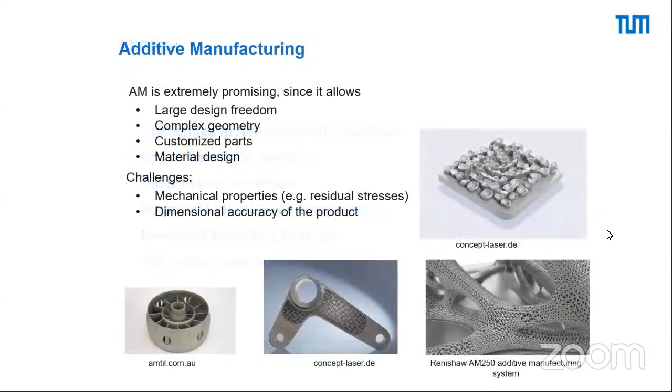Let me start with - I think this introduction is really not necessary in this seminar, so I have only one slide. Additive manufacturing is extremely promising. It offers large design freedom, very complex geometry, but it also has a lot of challenges.

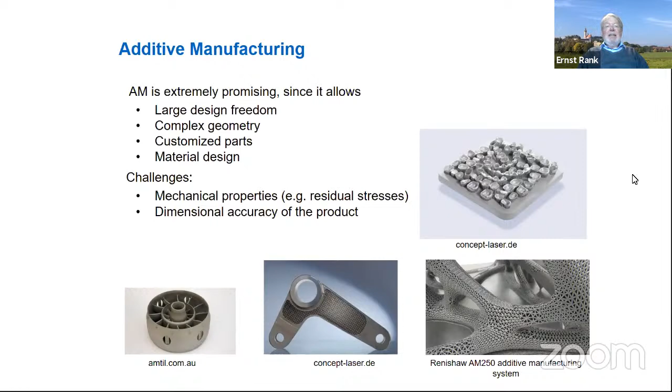I just mentioned two. Wherever the mechanical properties, and in particular the distribution of mechanical properties, are important, then we really have problems to solve. And the same, if the dimensional accuracy of a product is important, then additive manufacturing is in many situations not completely competitive with other manufacturing technologies which we are having. So there is still a lot to do, and I think the simulation can help a lot in it.

Main challenges - I will concentrate in my talk on laser powder bed fusion as a technology for AM processing, where it has to be said, of course, that quite a few other technologies for producing metal additive printed parts have very similar problems.

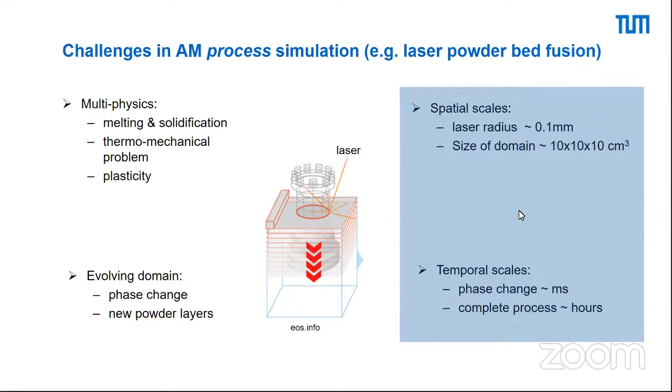The problems there are multiphysics, we have evolving domains - this, I think, is completely clear from the process itself. I will concentrate on the right side of this slide, so on the spatial scales and also on the temporal scales, which are, from a simulation point of view, I think, as demanding in the temporal as in the spatial scales.

Looking at the scales which are there, it's a small plate, 2.5 by 2.5 centimeters. Looking at the melt pool we are having there, the dimensions are in the range of 400 micrometers in length and about 40 micrometers in depth.

This very simple example, one stroke only, one layer only, so one cannot really speak about additive manufacturing or 3D printing there. Nevertheless, the difficulties already get visible for this very simple example.

Well, what do we have if we look at the thermal problem only in this case? I boil everything down to the most simple problems which we can address, but where we see all the problems.

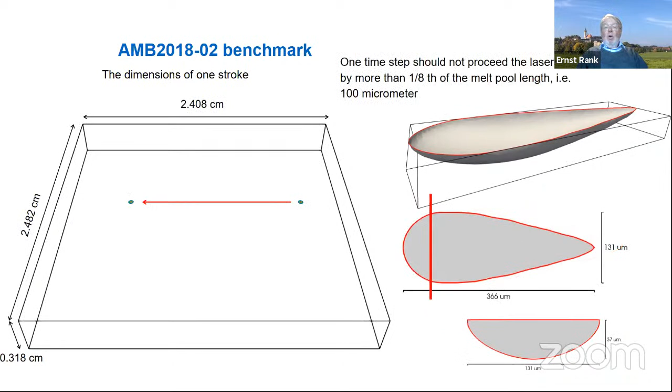If we want to follow the path of the laser, there is a rule of thumb that we should not have time steps larger than, say, 1/8 or 1/10, maybe 1/5 of the order of the melt pool length. So this is the physically motivated time step: move the laser by such a length, which would be about half of the diameter of the laser spot itself.

What does this mean? This shows that we go at most 100 or 50 micrometers, meaning that for this simple stroke which we are having here, we need about 500 time steps for this one simple short stroke of 2 centimeters.

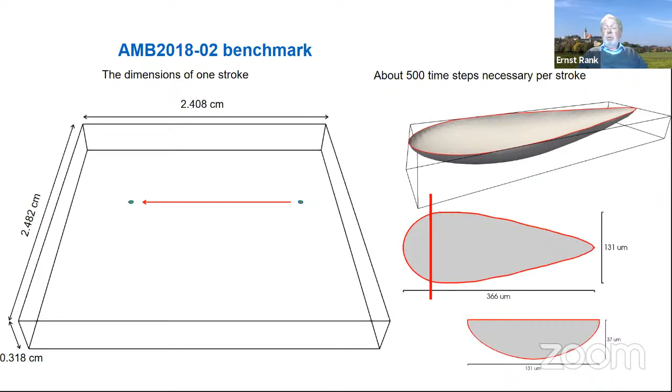Let's look at a little bit more complicated problem. Let's look at this square, which is hatched, again 20 by 20 millimeters, and the enlarged part shows the scan strategy of the laser. It goes diagonal, starts up in the corner, goes out in the corner, and then goes to and fro in the diagonal direction of this square.

We already have, for this very simple problem, again only one layer, a laser path length of about 2.5 meters, meaning that for this we need 50,000 time steps if we really want to resolve the physics on the scale of the melting pool.

I think it's not necessary to mention that a lot of the important physics happens on scales much lower, going down to the molecular level, but I only concentrate on this macroscopic level, from the melt pool to the laser path. 50,000 time steps are necessary by the physics if we want to resolve really what happens with the laser in this thermal problem.

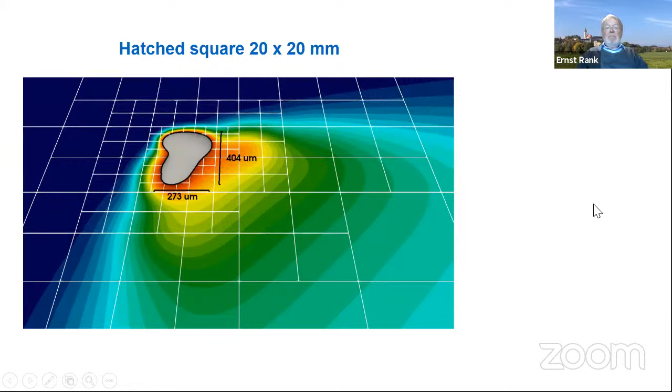We see the dimensions, and one thing I want to mention is if you look at the shape of the melt pool, it is not that easy as it was in the simple single stroke. It is a really three-dimensional shape which we are having there, and this shows that the strokes, the different directions of the strokes, just around the corner here, influence each other.

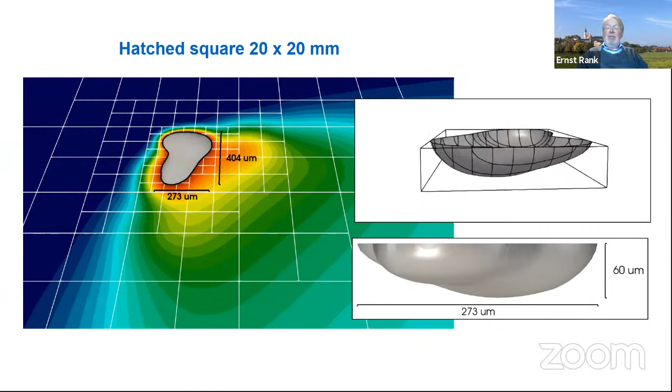Of course, there is a possibility to shorten the simulation by not looking at an individual stroke, but by looking at a full layer. We can get a lot of information out of it, but to really simulate more of the physics and the interplay between the different strokes, we really should be able to follow the direction and the path of the laser.

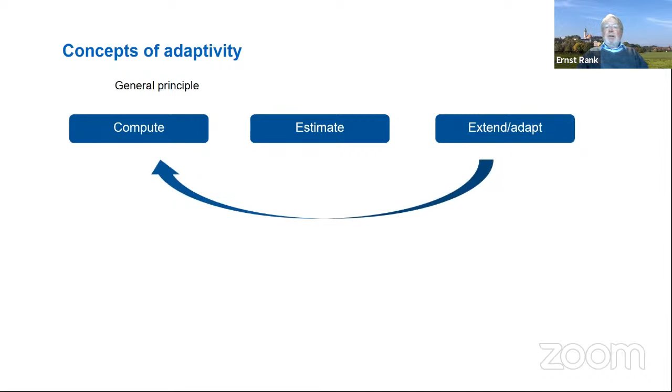So what does this mean? We need adaptivity. The general principle of adaptivity is we compute, we estimate something, we may estimate the error, or we may estimate other quantities to which we adapt. We extend or adapt the space of approximation from the computational point of view, and we loop over this until some criteria is met which allows us to stop the computation.

So for the extension or adaptation in space, we have the well-known H version, meaning we refine or coarsen the mesh. We have the P version, we increase or reduce the order of approximation, or if we use isogeometric analysis, we may also have a combination like increase and reduce order and continuity.

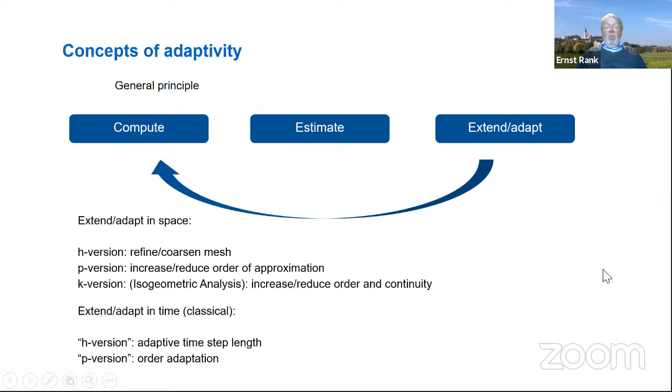Looking at the time scale, and this is important, we have a spatial-temporal problem. We have the possibility to also adapt the time step length, or we can adapt the order of approximation. So this is what is possible there. Please be aware, and I think this is important, when we simulate additive manufacturing, we are always talking about 3 dimensions in space.

So space and time means 4 dimensions. And this is exactly where I think a large challenge from a numerical point of view is: we should have 4-dimensional adaptivity in space and time.

And this brings me to space-time finite elements, which we consider a very interesting candidate, in particular if we look at adaptivity. For space-time finite elements, there is a long list of literature. It started already in the 1970s, and recently, if one looks to the research of Langer, it goes to isogeometric analysis.

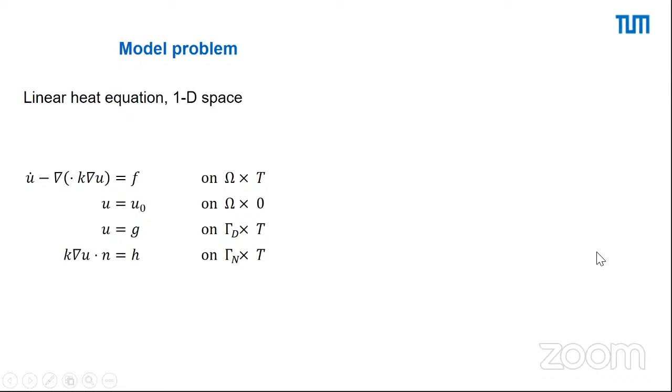To our knowledge, there is not yet any really general software around which would be adaptive in space and time, so in this 4-dimensional setting. I will try to show you some ideas and first results which we have in this direction.

So let's look at a model problem, and to explain it, I start with the linear heat equation in one space dimension.

So, general formulation as you see it here: what is used in most, I would say 99% of all cases in engineering applications, is the method of lines, meaning that we have a different approximation type in space and in time. So in space, for example, with finite elements for the spatial operator, the Laplace operator which we have here, and finite differences in time.

And well, you can use many schemes. I formulated here just the backward Euler. That's standard. And this means if we draw the space-time grids which we are having here, horizontal for space...

...so one-dimensional, and vertical for time, then we have a uniform, adapted grid, so just these elements which we have here in one line, at one time step, we are, in the simplest case, proceeding in equal length time steps we are having here. So this means that we refine and de-refine with equal long time steps.

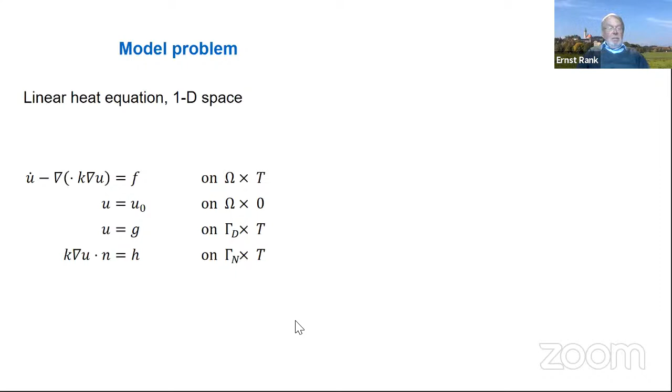Okay, so let me stop. That's astonishing, I see it. Stop the presentation mode and maybe restart it. Yeah, I stopped the presentation mode, one second. It's an informal seminar, so we don't worry. Yeah. I have a problem with my... It doesn't matter how many times we try, and you know how experienced we are, there is always the possibility that something doesn't go perfectly right.

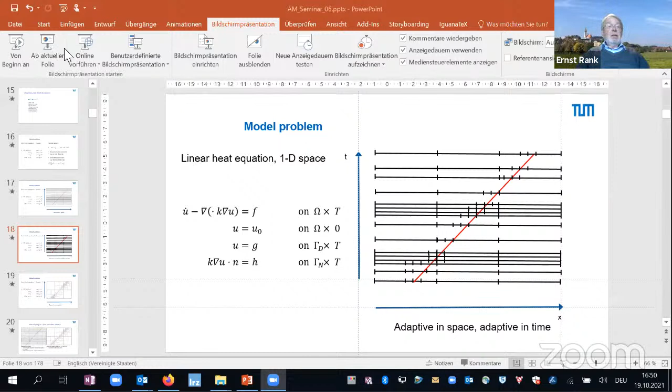Almost, okay. So you saw the movies at the beginning? You did? Yes, okay, it took a little bit of time, but then we saw it. Yes, okay, so let me check now again. I have stopped my PowerPoint and started it again. So now you see the... Yes, presentation mode, is it right? Yes, exactly, now we see the picture. Yeah, okay, so now let me... Okay, do you see still the picture? Yes, now we do. Okay, so there was some problem with my PowerPoint here, obviously.

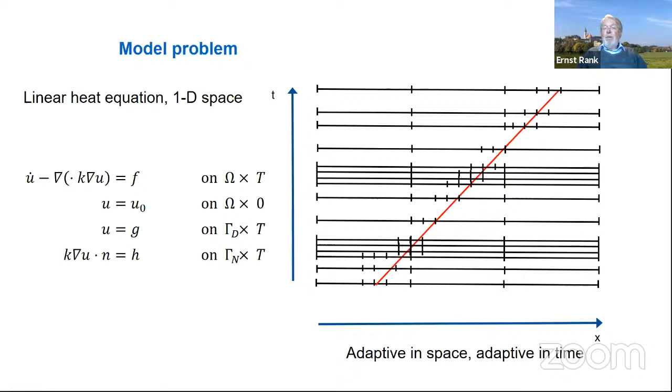Okay, so now here we have the adapted grid, and well, what you see here is a typical grid of a locally refined spatial problem. This is what we would have here, but this is different from time adapted. And this one, which is still a kind of adaptation we are having here, has of course a few problems compared to what we really would like to have, like this one.

If I compare these two approaches, well, here, either with the uniform or it would be the same with the time adapted, we have parts which are out here - for example, you see my mouse here? Yes, we do. Okay, in parts here, we have much too small time steps.

Nothing is happening, and this would be far away from the laser in a sense. Nothing is happening, nevertheless we are having small time steps. This is different if you look at this as space and time. So I have here coarse space and coarse time, so much more advantageous with respect to the number of degrees of freedom.

There is another problem in this method of lines, and this comes with high performance computing. As you all know from the structure of this method of lines, we can compute one spatial problem for one time step. Even if this may be rather large, if you have really huge hardware, high performance computing, then this might be a problem which is too small to be really efficient.

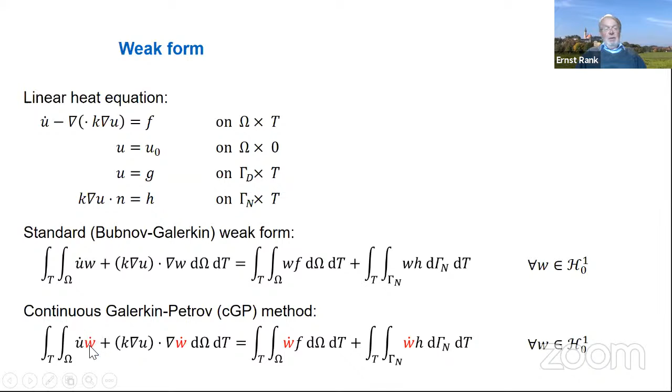Another one, and there are many methods around, another one which we are investigating and using, where you use instead of the functions for weighting the derivatives of the function, so that you get here a kind of symmetric term in the time derivative. This is then continuous for the shape function, so continuous Galerkin, and a Petrov-Galerkin in that sense that we have a different derivative in the weighting functions.

Okay, so as I said, we want to go, and we really want to make the big step. We want to go adaptive in space, adaptive in time. We want to be able to make H refinement, and we want to be able to make P refinement. So the full register of all possibilities which we would like to have.

What we are using is a variant of the multi-level HP refinement, as we call it. What is the idea of it? First, look into the one-dimensional example. Lowest level, we have shape functions: linear ones, quadratic ones, cubic ones, and quartic ones in this case.

In principle, in all 3 one-dimensional elements. So over the middle element, we take out the higher modes. We use an overlay mesh where we have again a similar ansatz, so linears, quadratics, cubics, and quartics.

And importantly, at the boundary of this overlay, we impose a zero Dirichlet boundary condition, and we add up these levels, meaning that the sum of this is refined in this middle part, and it is continuous, as at the interface a zero is added from the overlay. And you can do this not only in one layer, you can do it in an arbitrary number of layers.

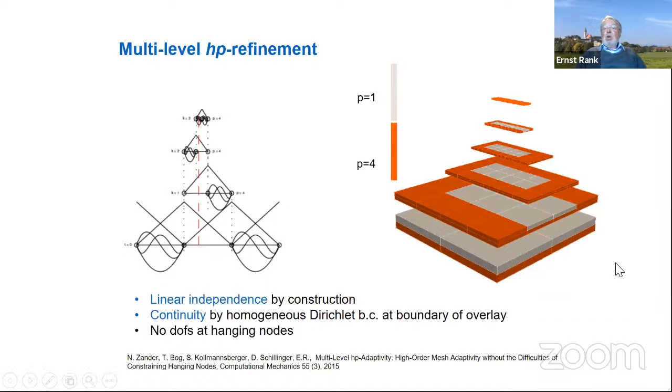Well, how can you do it? We start with a P version of the finite elements, and now I come a little bit technical, but I will try to show that there is a data structure which is extremely and astonishingly simple, so that you can make this adaptation in any spatial dimension.

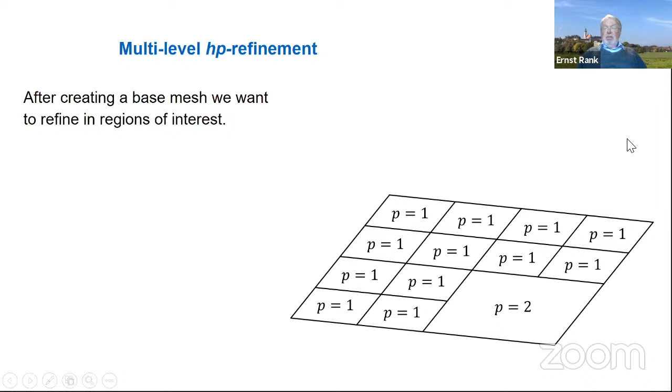We try now to make an approximation, and this is an HP approximation. So, well, if you look at this mesh, then you have something which is a hanging node here, and you have polynomial degree p = 2 and p = 1. So what are the standard approaches? So this is not the hierarchical one. What is the standard approach?

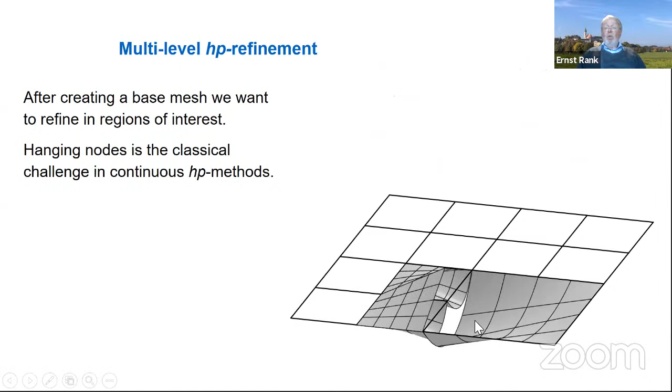We have to deactivate shape functions at these hanging nodes, meaning, well, if we have on the large element a quadratic shape function here, and on the smaller elements we have the linears and these quadratic ones, well, then we need to do something. Looking at these 1, 2, 3, 4, and 5 shape functions, then we need to get continuity, meaning that what is on these elements is composed of this shape function, this, and this one.

So we need a combination A, B, C, and D, so that the continuity is guaranteed. Well, this results in a small system of linear equations to get these coefficients. So this is possible, and this is done in many of the HP codes which are in some research implementations around. Well, the problem, if you want to implement this in 4 dimensions, I would say at least that it is very ambitious. I would even consider it as impossible in practice.

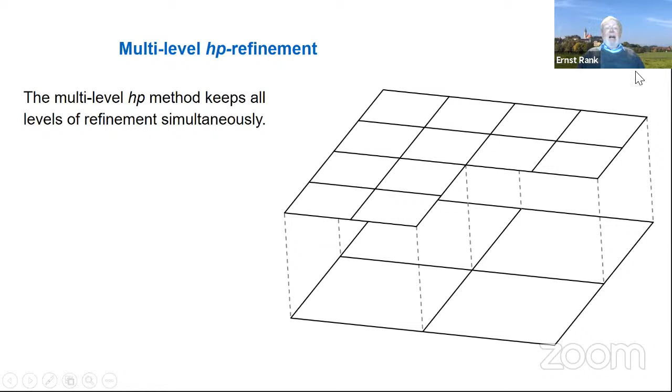Now let's look at the other approach, this hierarchical approach. This is again our mesh, which we are having, but this is composed out of 2 parts: a base mesh, and an overlay mesh in this hierarchy. And now I define first, well, I look at the shape functions which are defined on the base mesh.

For this one I define the quadratic ones in the right or lower element, and the linear ones in the left elements, and in this upper elements, which are below the overlay. So this was the definition of all the shape functions on the lower level.

Now let's look at the higher level. So what is the activated set of shape functions? Well, remember, on the overlay, we choose only p equals 1 for simplicity. You could choose any other polynomial degree. It might be higher than on the lower level, it may be the same, or it may be lower. And this is what we are having here.

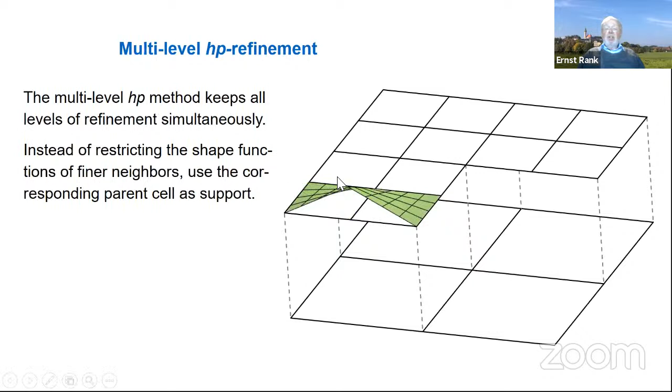So we have this shape function, and this is one which we want to keep in our ansatz space. This shape function, the same, and different to this shape function. Look at this. What is different to this shape function from the one which we had before? Well, it's exactly this edge of the element, which is a connection to the lower hierarchy.

And if you remember, the trick in this hierarchy is that I say, well, along all this boundary which is connecting to the lower level in the interior, I impose 0 boundary conditions. Well, 0 boundary conditions mean I do not take this shape function. I just deactivate it.

Let's look at further shape functions. The one back there has no interior connection to the lower level. The same for this one. This one, again, has a connection along this full edge and is deactivated. Not deactivated, this one—this is active. This is non-active, deactivated, and important also in this element which is in the corner back there.

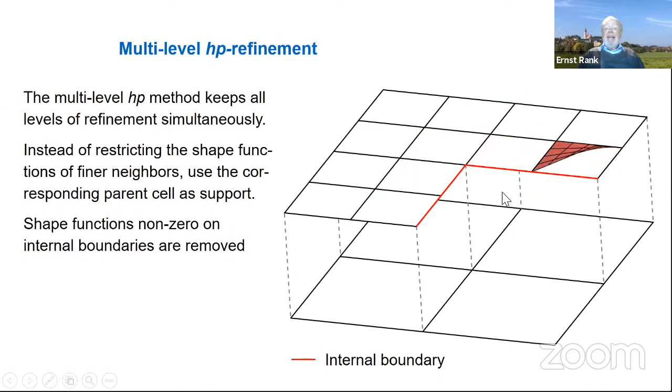And in this way it goes on, and we activate or deactivate shape functions on and on, and we do this for all levels of the hierarchy.

Well, I promised the data structure, and this is something astonishingly simple. What we are using is a d-dimensional array of Boolean variables, a tensor product mask to trace or track active functions.

D-dimensional means, in 2 dimensions, I have a 2-dimensional Boolean template. Now let's look at the equivalence of the activation, deactivation, and the template.

So what are the steps? In the first step, I activate all shape functions which are on the lower level, and on the higher level, the leaf elements. What are leaf elements? These are, if I look from the top, all the elements which I see and where I want to loop over my element matrices.

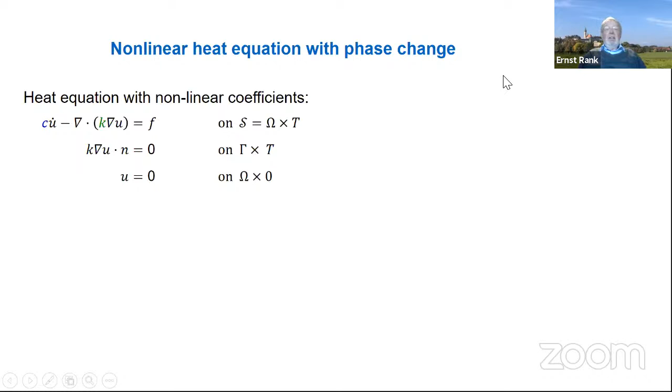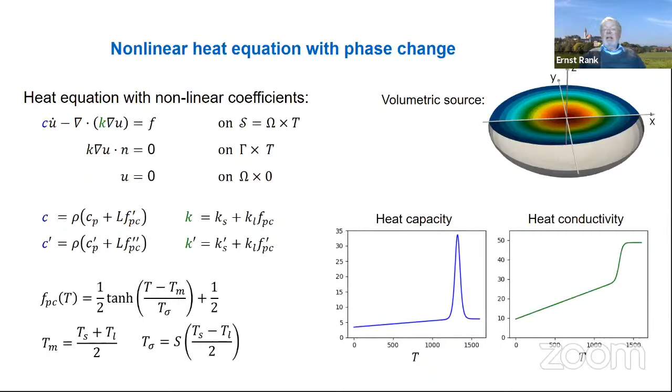The heat equation is now considered in the non-dimensional, non-linear setting. So I have a volumetric heat source. I have a phase change function which defines — I don't want to go into the details — a non-linear heat capacity, a heat conductivity, with a phenomenological model used by such a phase change function, which we are having here.

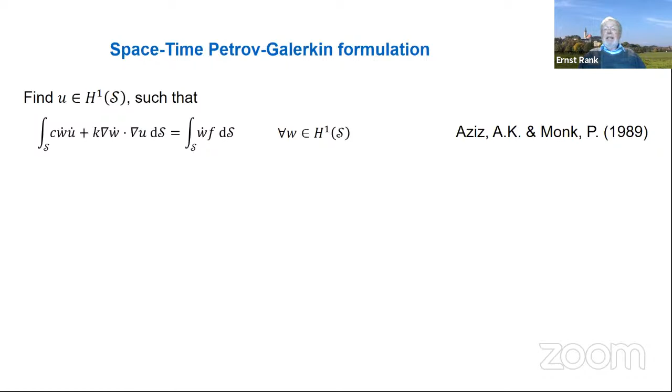And again, a space-time Petrov-Galerkin formulation, which is non-linear now in this case. This goes back actually to 1989, to a publication of Aziz and Monk.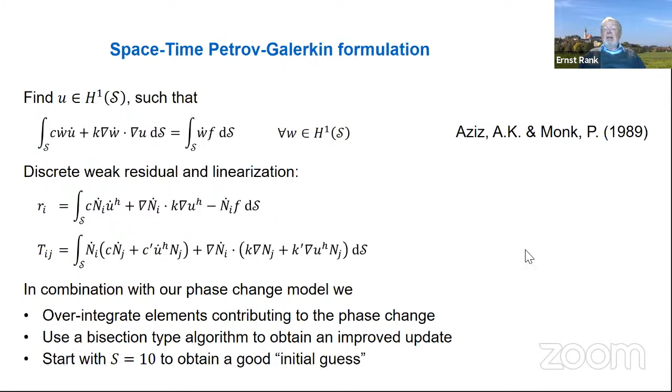So the linearization needs a discrete weak residual, and in the Newton method we solve this in this time-space Petrov-Galerkin formulation, with over-integration in the elements where the phase change exists, and a bisection step in the algorithm to improve the update. We start with a smoothing factor to get a good initial guess in this 4-dimensional Newton finite element method.

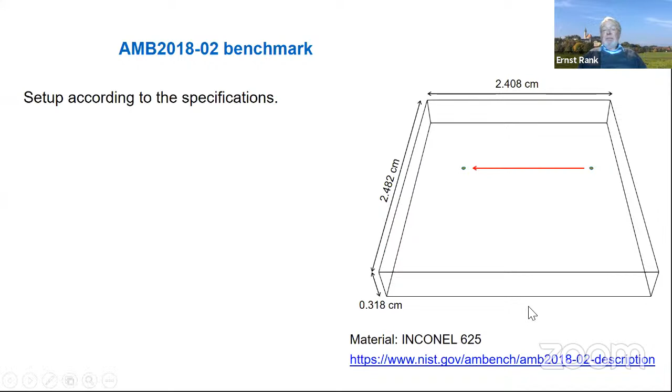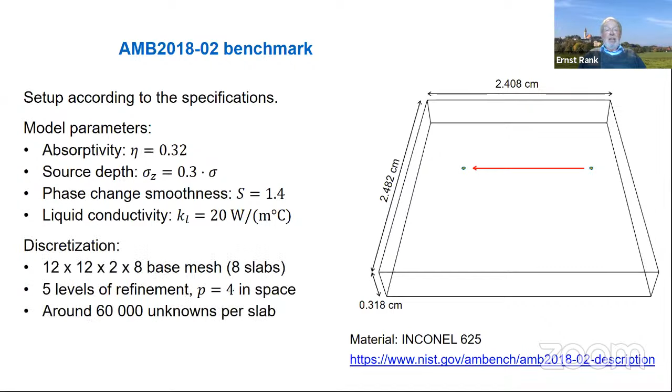Okay, let's come back to the problems which I showed you already at the beginning. Parameters are adjusted exactly as defined in this benchmark problem. I start this 3-dimensional spatial problem, with 1 dimension in time, with a base mesh of 12 by 12 by 2 elements and 8 slabs in time, using a p degree, p equals 4.

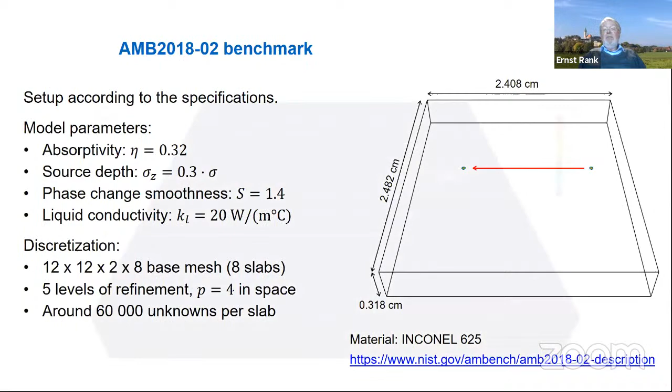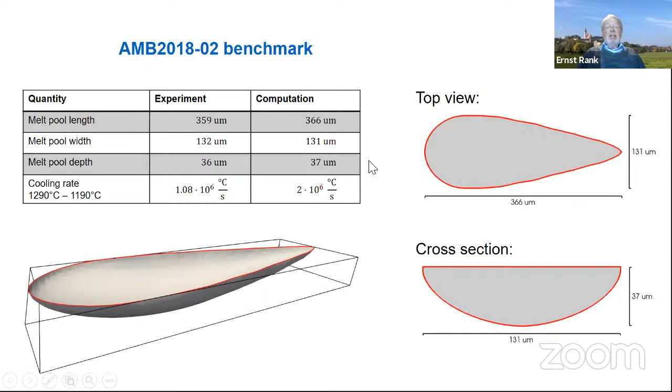So this is quite a high p degree, so high accuracy. And well, you saw this video already at the beginning, comparing experiment and computation with the parameters we have adjusted here. You see a very good agreement in this table concerning the cross section and also concerning the length and width of the view.

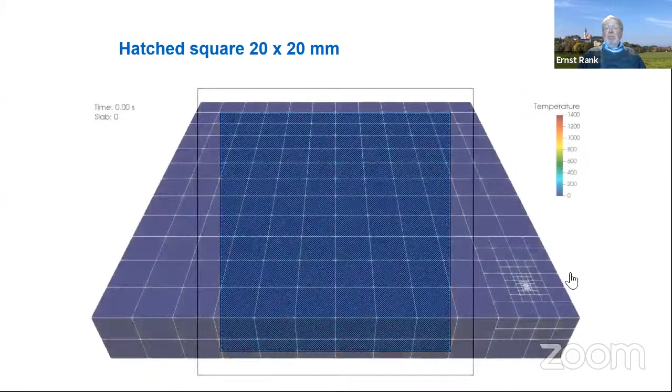Now let's look at this hatched square. You see the laser running first around and then hatching in the diagonal. What is important is the spatial adaptation. On the left side up, you see the slab, so this is the time adaptation. You can see in this cut that it's really three-dimensional.

What you see here would be in real time, so this process is really about 6 seconds. The computation time on a powerful workstation, I would say one CPU, is still in the order of 10 to 15 hours. So still quite a significant time for this problem.

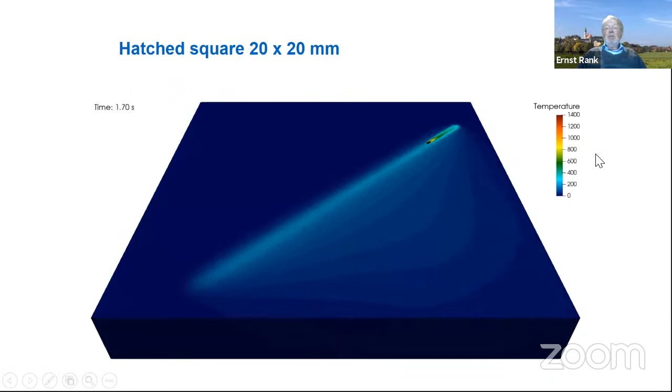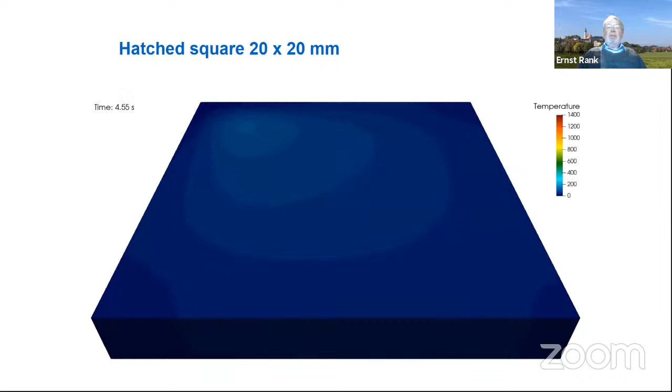But as I said, it's work in progress. We are going now to real high performance computing, where we expect to come down to minutes for this simulation, where really the physics is resolved in this scale from melt pool to the layer.

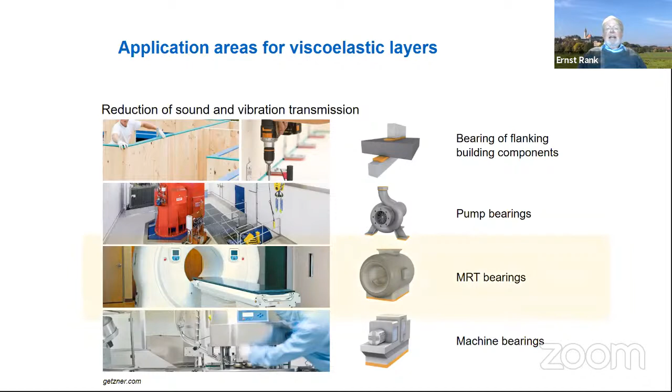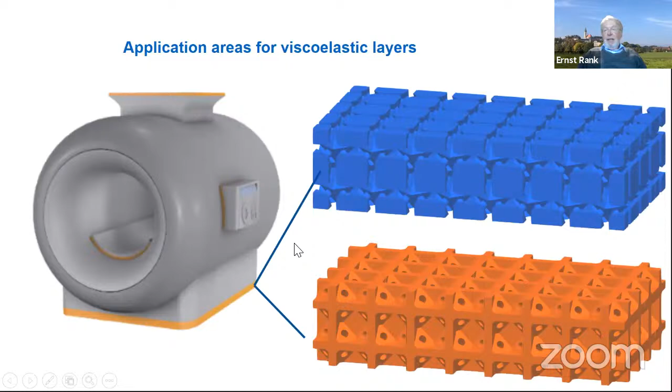Now I will go very quickly to the last part of my presentation, the application area of viscoelastic layers, which I address. This is motivated by an MRT which is layered on a bearing, a really interesting construction concerning a possibility of application of additive manufacturing in a composed way.

Actually, we have first printed parts with our colleagues in the mechanical engineering department in Munich. So this is a first part of the lattice, which is the core of this viscoelastic layer.

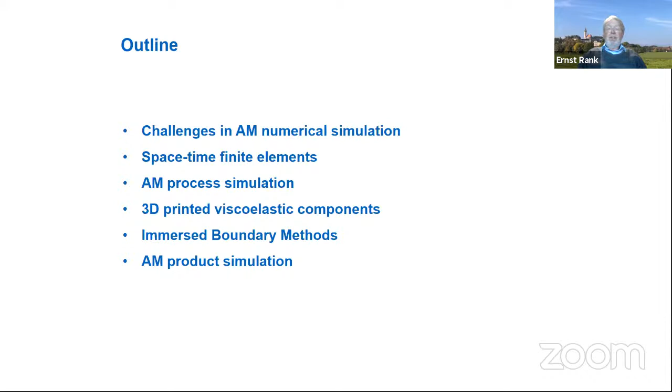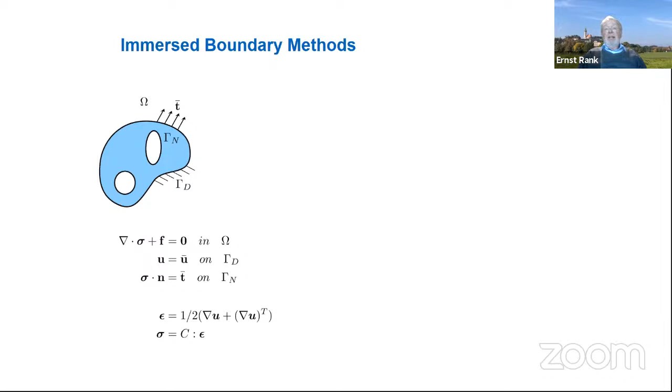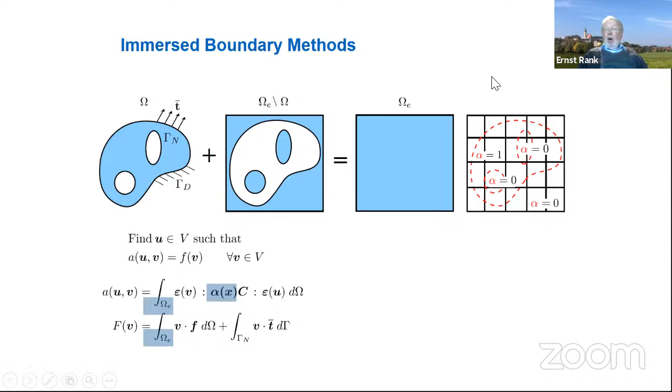We are using immersed boundary methods to simulate this composed structure, and I've talked about these immersed boundary methods very frequently. I give only the general idea: we embed a structure, which may be complex, into a larger, simple geometry meshed in a simple grid. In addition, we have an indicator function which tells us what is inside and what is outside the domain of computation, translating to a formulation on this extended or immersed domain.

These immersed boundary methods have, of course, a lot of problems to be solved. We have cut cells, characterized by the boundary going through these cells or elements. We need to find efficient and accurate ways to define boundary conditions. We have to solve stability and conditioning issues in case of small cut cells. And we also have, of course, to have local refinement.

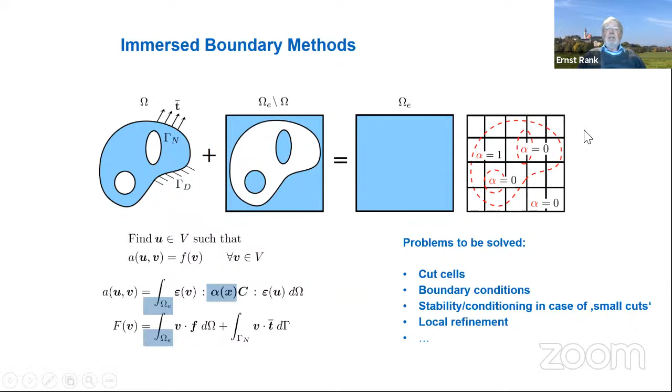But what is important, this can all be used in exactly the same way as I showed before, with this space-time approach. Local refinement in 4 dimensions is possible also for these immersed boundary methods. There are several variants around. I use, and we are using in Munich, the so-called finite cell method, which is high order in time and space, with local refinement, hierarchical, in the way I showed you in the first part of my presentation.

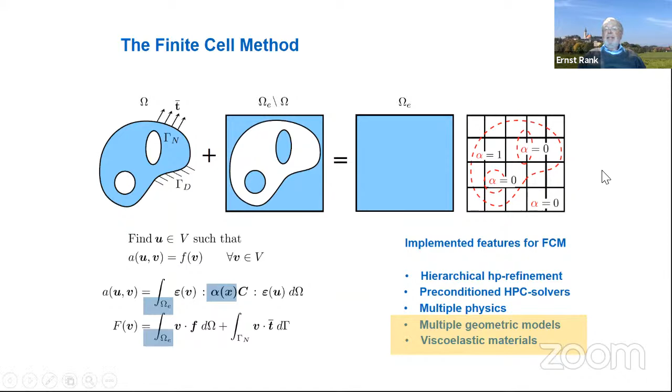What is interesting for these structures, important here for these viscoelastic dampers, is that we can use multiple geometric models, in particular geometric models which are very well connected to parametric design, parametric CAD design, for these basic cells for these dampers.

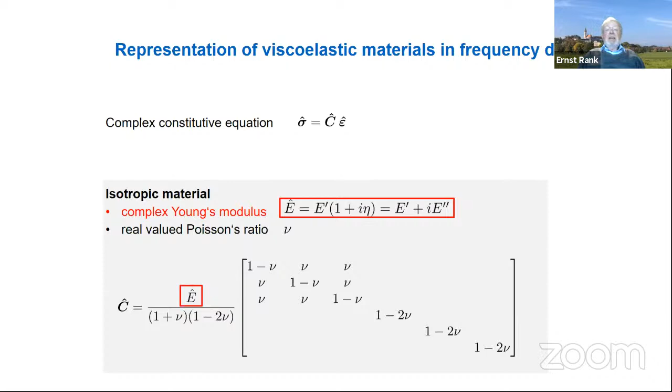The viscoelastic material we are using is a linear viscoelastic material, described by a complex constitutive equation. So what is changing essentially is that instead of a real valued elasticity modulus, we have in this case a complex modulus and a loss factor, which is a measure for the viscoelasticity, related to the materials we use as components of this connection.

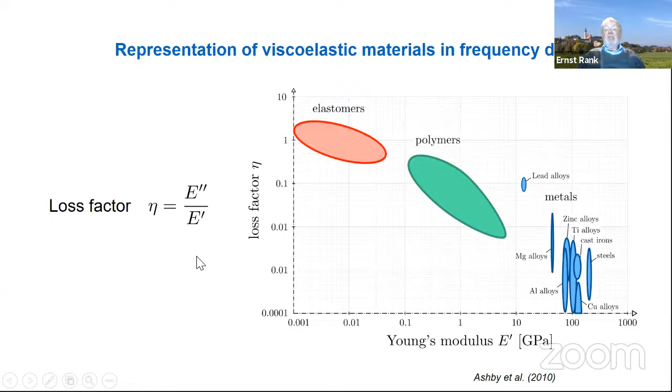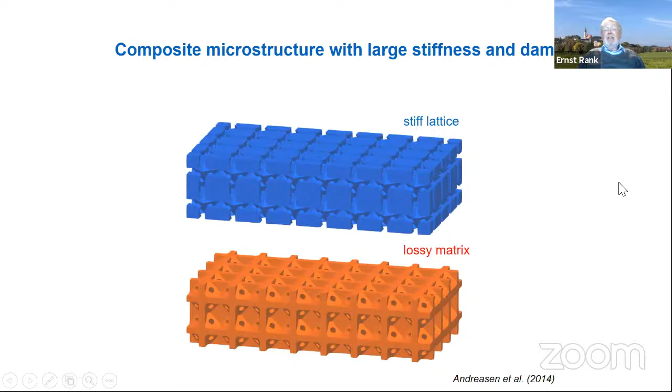So the elastomers or polymers and metals, which we are combining in a stiff lattice and a lossy material matrix. The stiff lattice is something which is in a sense ideal to be manufactured by additive manufacturing. The lossy matrix is then just filled in, and the structure we are using was defined by Andreasen and Sigmund in a publication in 2014 by topology optimization. Essentially, they got it in this way. The material of the combined structure is composed, on the microscopic scale, out of these two types of structures we are having.

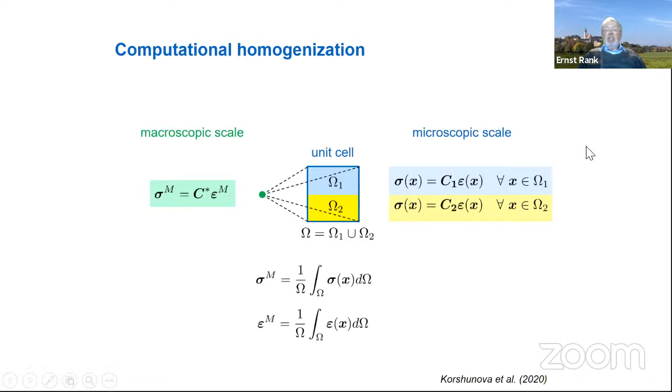On the macroscopic scale, we are obtaining it by computational homogenization. This homogenization approach means that on the micro scale, we use essentially virtual test cases. In this case, it's 6 linearly independent load cases, and from these, by local computation and integration and averaging, we obtain macroscopic material properties.

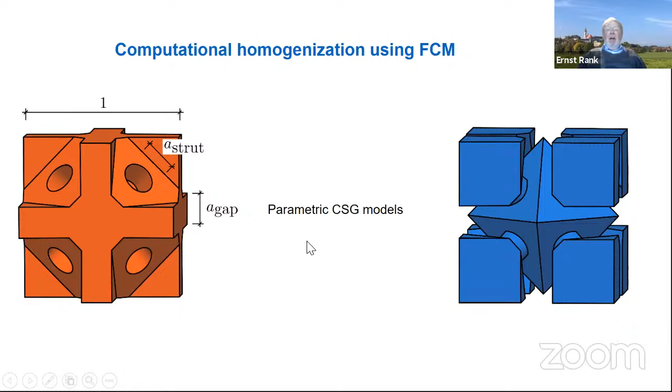The model of the microscopic structure is a parametric constructive solid geometry model, and the geometric properties are this a strut and this a gap. We have the goal to define the properties with the finite cell computation for a large variety of combinations of these parameters.

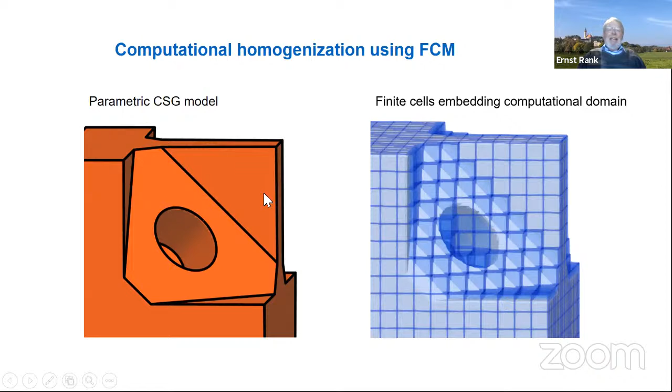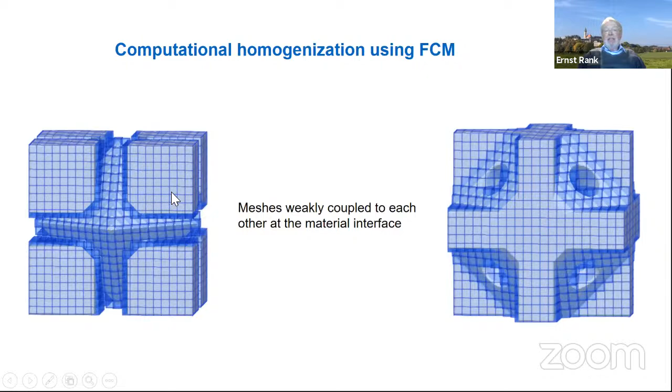We embed each of these parameters in a completely automatic way and couple the lattice with the matrix, and get finally results for this large set of parameters.

I would just like to show the principle of what we are having here. We have a large number of computations for all these parameters and get these tables or diagrams where, from an engineering point of view, it is possible to find out what is the right combination of material, the right combination of the geometric properties to get certain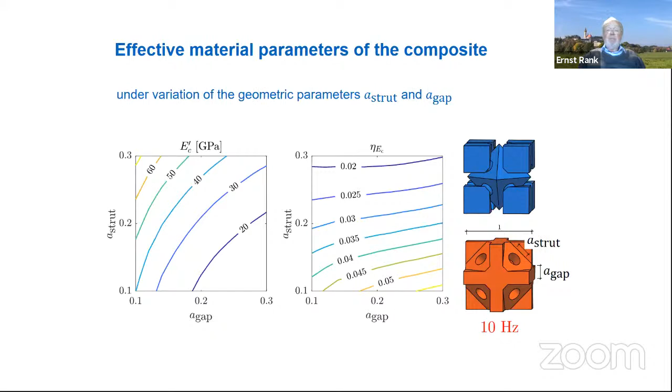combinations of material parameters in this composite part. So, for the last 2 or 3 slides, we embed now this damping structure in a larger one.

Take this viscoelastic layer as a damper in the larger part, and then we study different types of coupling the large parts with this microstructure. One type is really to make a detailed computation on these different levels.

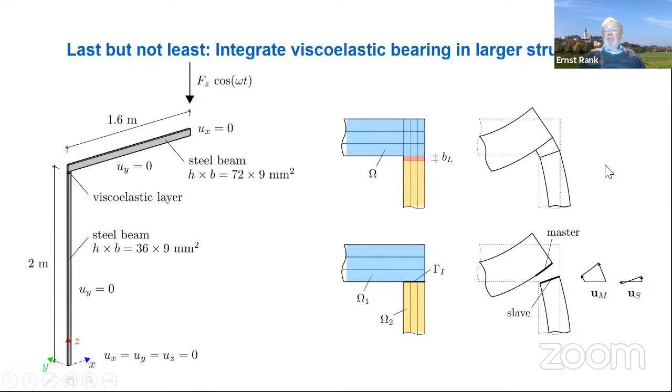This is possible, but leads to a large number of degrees of freedom. Another possibility is to use a mortar type simulation, a mortar type coupling of these combinations, and we'll show just the results.

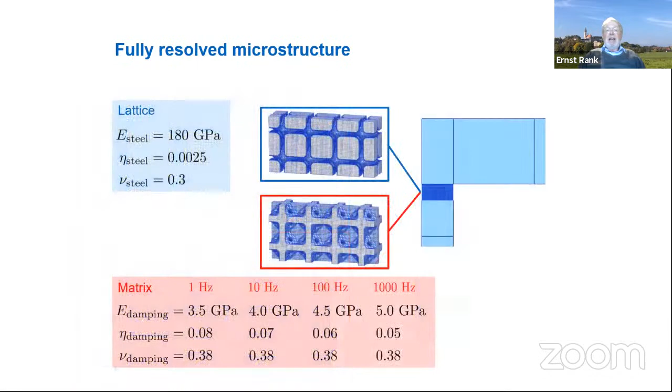I go to my last slide to come to the end of my presentation. If you want to look now at the frequency response, this is what is interesting from the application, from the engineering point of view. This is a large scan of frequencies with many, many parametric computations, zooming into part of it.

You see a cut through this structure in the different numerical settings. We have a fully resolved model with several millions of degrees of freedom as we go from the micro to the macro scale, or this homogenized approach with much less degrees of freedom, and even less with the mortar-based approach. You see that these results are very similar in the size of the loss factor, and looking at the scale, also very close together in the frequencies.

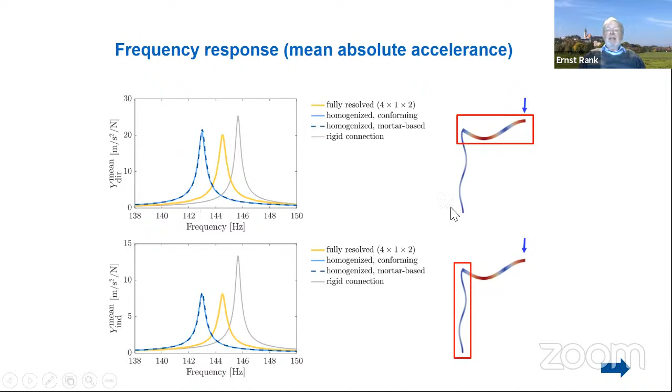I come to the end of my presentation. I tried to show you, in particular, a possibility for space-time finite elements, which seem to be very attractive for these spatial-temporal problems which we have in additive manufacturing. I also tried to show you that the finite cell method gives the possibility, in particular, to make computations which are adapted to a parametric approach, which we have in these applications.

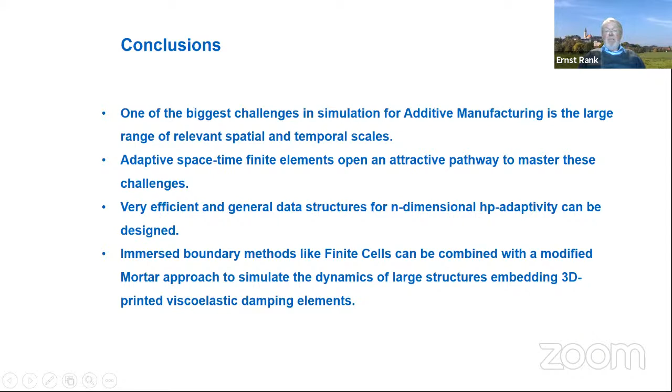Thank you very much, Ernst. Really, thanks. Thank you very much.

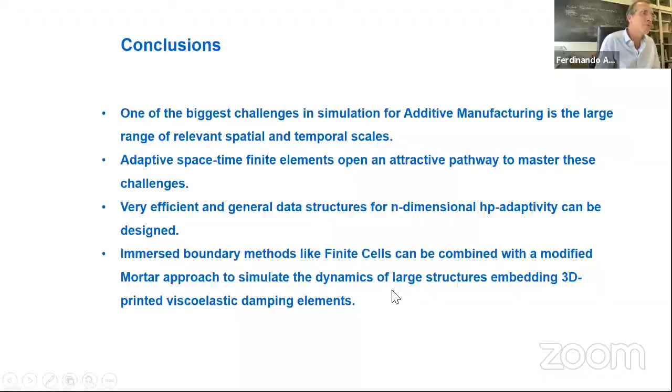A very deep presentation. You said you were going to talk only about the challenge of scales, but in reality, especially in the second part, you addressed many other subjects and very interesting points. I recall, quite a few years ago, we were just at the beginning of our discussion on additive manufacturing, and we were discussing the issue of scales. After many years, we are still struggling with this aspect, but I really think this is also the beauty of this manufacturing technology, posing many challenges from the practical point of view, but also from the computational point of view. So thanks for this very inspiring lecture and the many points that you raised.